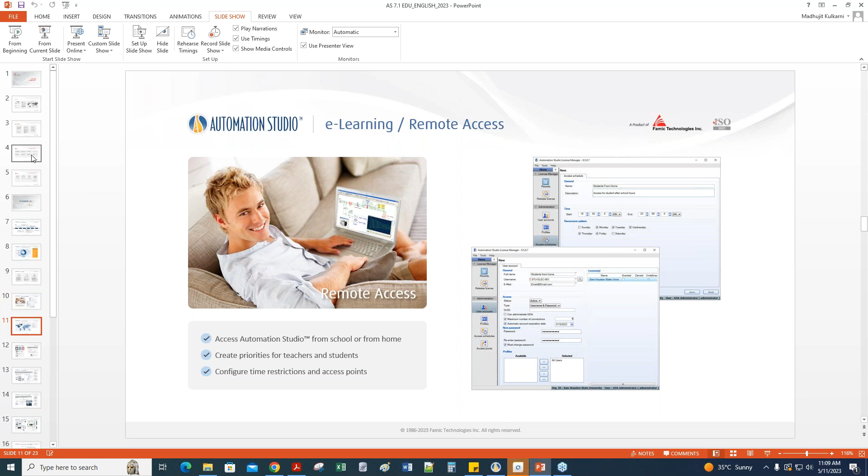Automation Studio is present in about 11 different languages and in about 120 countries. It is being used in high schools, career centers or training centers, colleges, different universities, and also for workforce development, where corporate people use the software to train their engineers.

These are the interactive exercises I was talking about. In the Teachware, students can access different exercises, and there are quizzes they can answer, and they can also generate their reports. This helps them understand the basic concepts used in the software, and they are able to relate it with the actual environment.

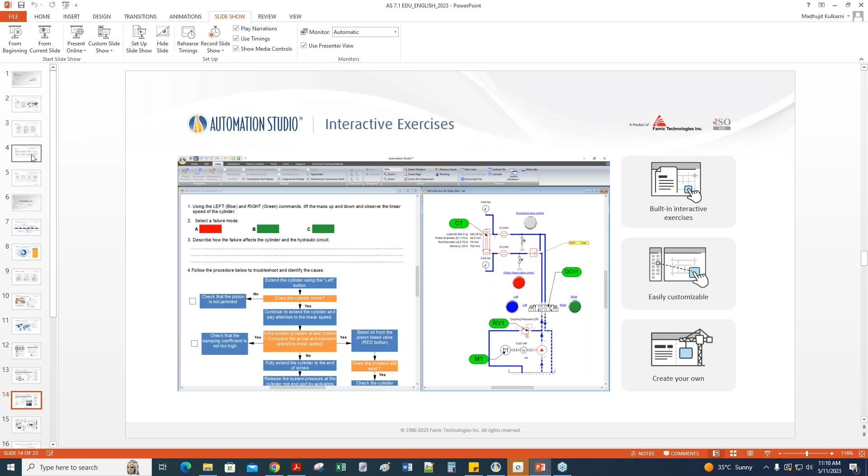Now in the latest versions of Automation Studio, you will be able to see the digital twin of your equipment. That is, the actual hardware kit can be represented exactly on the Automation Studio diagram, and you can physically verify the results from your laboratory getting implemented in AS, or vice versa. So that basically is the digital twin.

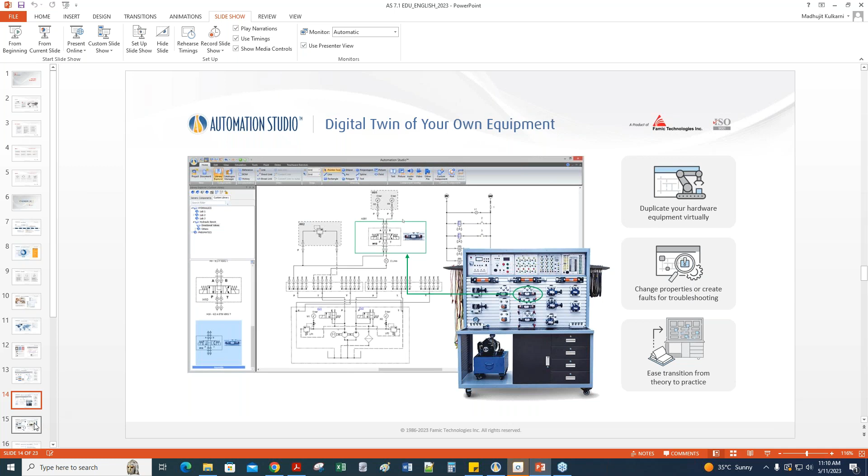There are a lot of illustrated libraries. I will show you, once I start the session, wherein you can view different components or different projects where the actuators or the equipment give you a real-time view of what exactly you see and how that can be represented in AS. That is what is meant by the illustrated libraries.

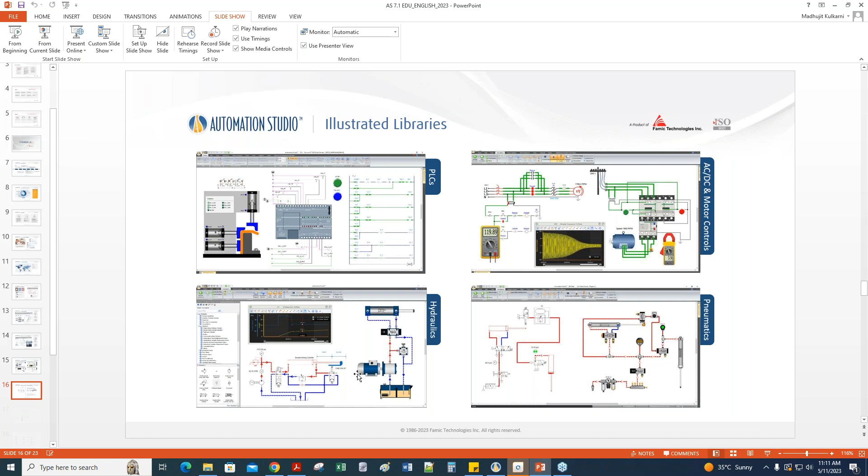So the benefits plus the hands-on experience is what you get, with hardware only, that is the hydraulics and electro-hydraulics trainers, and also hardware plus Automation Studio. This could be the less expensive option that you might opt for.

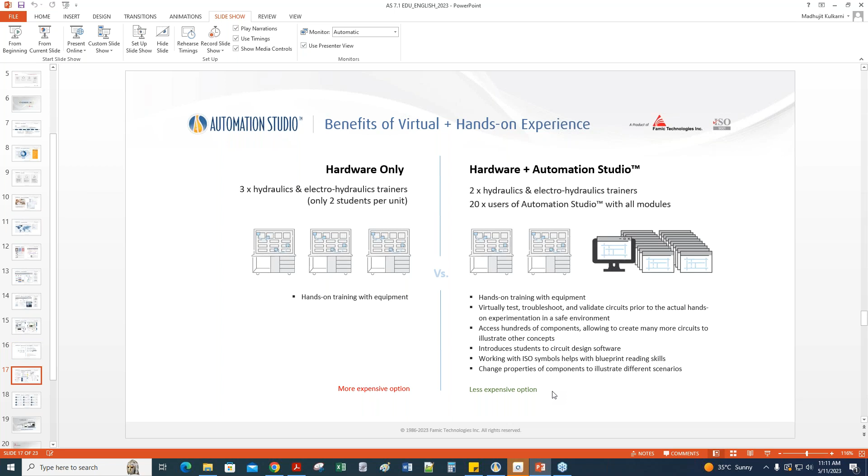We also offer complementary consultancy services, that is support. We also have the AS Live manifold. These are the three clients for which we have developed different manifolds, and we also develop configurators for manufacturers. For example, for Eaton, you can select the part number or code and drag and drop this particular product from the catalog. Similarly, for HydraForce and Rexroth, we have developed the manifold.

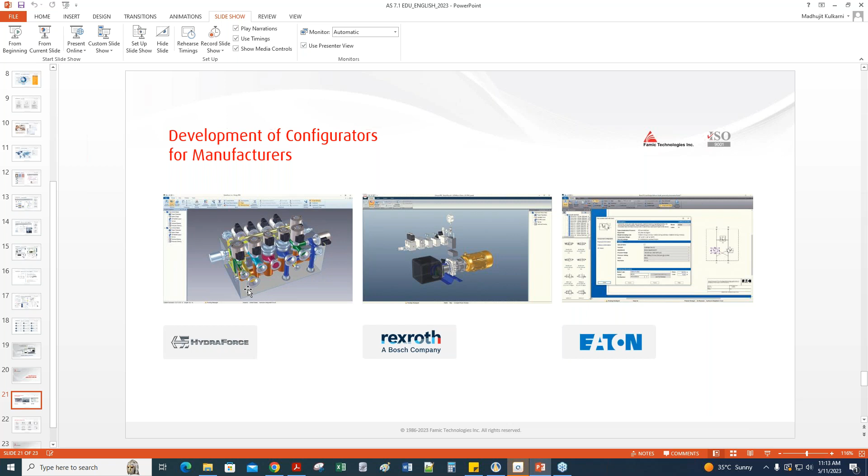So, training, maintenance, and services - this is the support we can give, right from training at customer premises up to turnkey solutions. That was it for the presentation, so now we will proceed with the actual session of pneumatics.

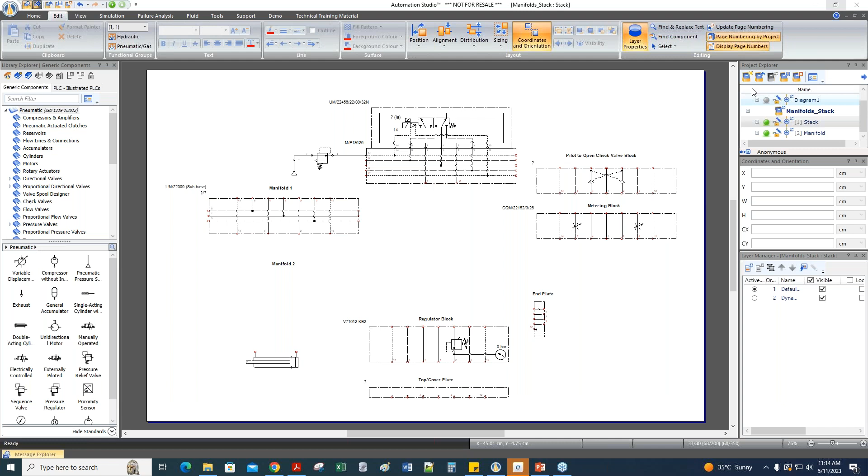Now coming to the software. Upon opening the software, this is the Automation Studio Professional Edition. If you come to the Library Explorer upon opening the software, on the left hand side you basically have the different modules we work upon, right from pneumatic, different electrical controls, ladder, electrotechnical, block diagrams, and HMI control panels.

There is also hydraulic in this. You can just select whichever library you want over here. On the right hand side, you have the project explorer, so you can just open this particular project, save it or close it from here. You have the access over here.

On the top, you have the different options, the ribbon, which will have the home tab, edit tab, view, simulation, failure, demo, and the technical training. So you can select different options to work upon.

So now coming to the pneumatic section, if I just select this library, here we have the default products or the most frequently used products. You can see different types of compressors, sources, pressure gauges.

These are the frequently used products available over here. So if you want to go for any specific product, you just have to go into this pneumatic module. If you just click it, you will get a drop down, from compressors up to the different measuring instruments. So you have a detailed list and you can select the components as per your requirement.

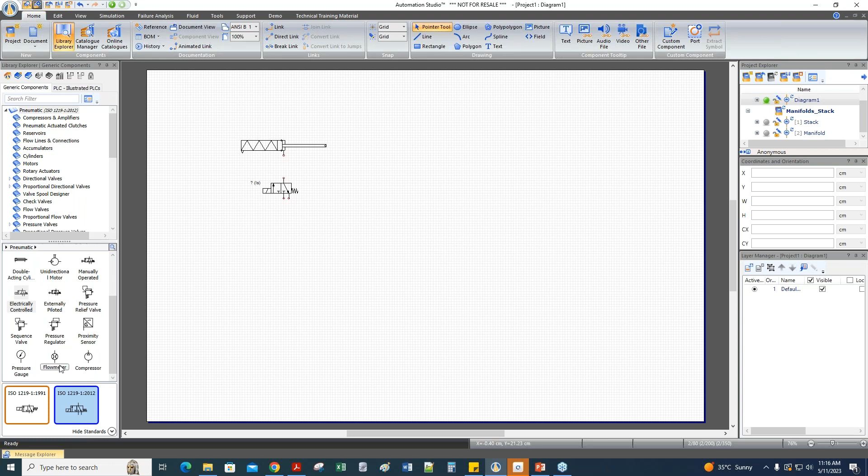So now we will just build a small circuit to see what all things we can do, how we can analyze the circuit in the pneumatic module. I will take, for example, the cylinder, maybe an electrically controlled directional valve, and a pneumatic source. From the fluid conditioning, I can directly take an FRL. I think these are the basic components just to build a small circuit.

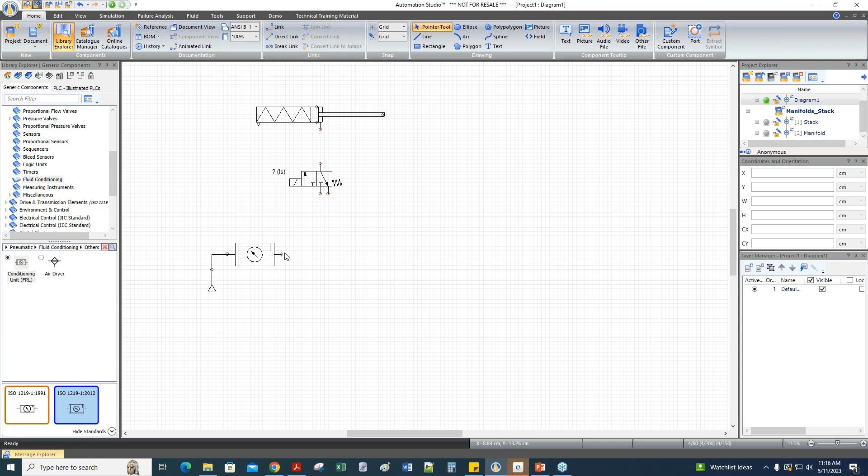So we will just establish the connection now. These lines are pneumatic lines, though they appear to be just CAD lines. If you just select this, it basically represents a pneumatic hose or a pneumatic connection. You have different properties, so you can change it over here, or customize it as per your requirement. So this is basically a pneumatic line.

Now to complete this, we will just connect an exhaust. So as of now, I've just built this small circuit. Now let us see basically what it does when I start the simulation.

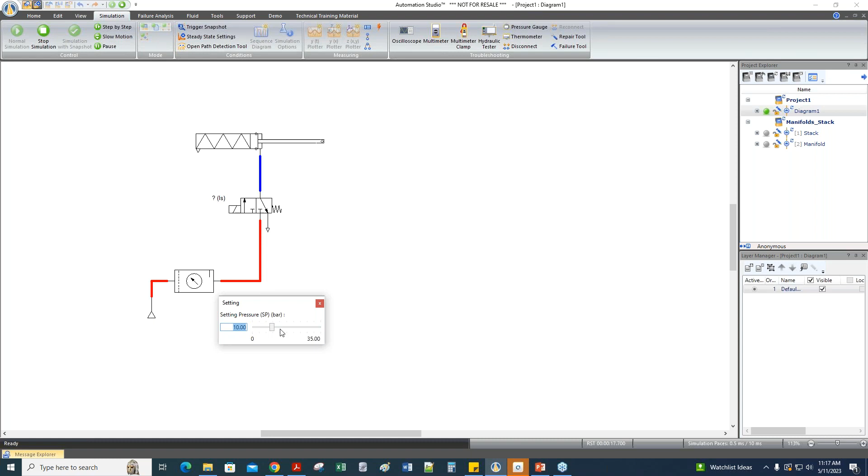Before actuating this, if you just select or click on this FRL unit, the only property that can be varied is the setting pressure, that is the output side, given by the regulator. So you can set it as per your requirement up to 35 bar.

Now if I just select this spool, you can see that the cylinder got actuated. Upon releasing it back, the actuator comes back and it remains retracted. So this is one way of just testing whether your circuit is right or wrong.

So now we can configure our circuit as per our requirement and the way we want. For example, this pressure source, if you just select this source, there is one illustration over here. The main properties are the diameter, and obviously you can vary the pressure.

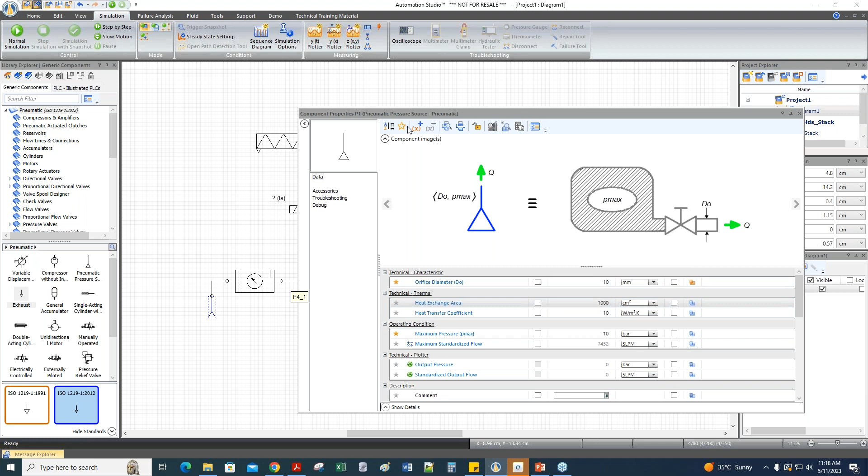You can vary this pressure or the maximum pressure you want in the circuit, and you can also vary this. For example, if I just change it to 10, you will see that my standardized flow will increase because indirectly my area has increased, so it is capable to give me a higher flow. In this way you can configure your pressure source, the pneumatic pressure source or the reservoir.

Similarly for the FRL unit, even here you can change the setting pressure. If at all you feel that the thermal simulation is on, you can even change the heat transfer coefficient and the area.

Now coming to this directional valve, this is a bit more advanced. Here basically you have this spool stroke. You have the pressure, you can change, you can set the temperatures, that is the range.

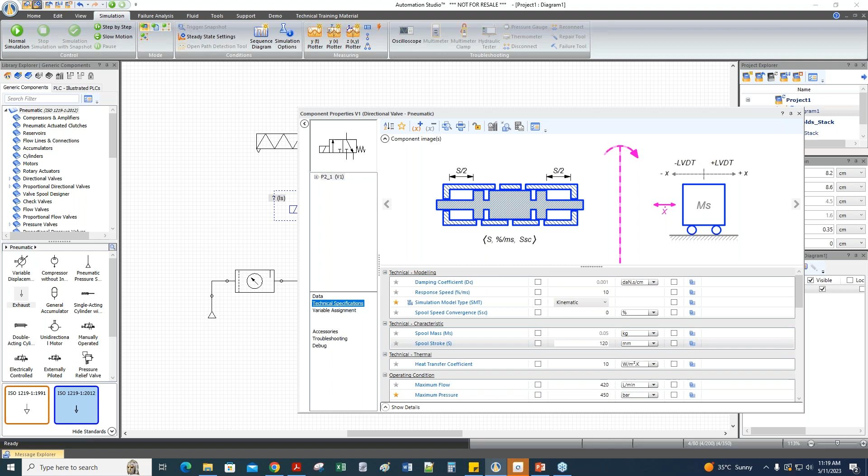Apart from this, if you just come to the technical specs over here, this offers you the type of command, the type of return you want. What I mean by that is, if you just select this solenoid and double click on it, there is a list of ISO 1219-1:2012 standard symbols, or the different types of commands available to actuate it. As of now we were discussing, the default I used was the solenoid.

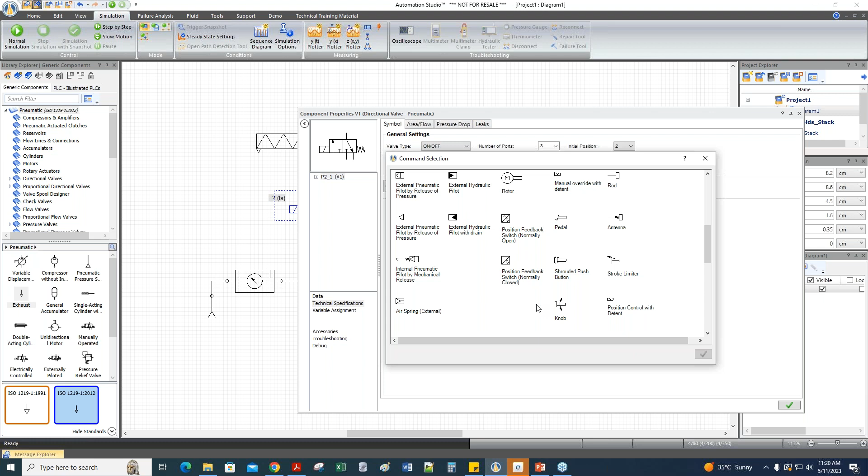So you can even actuate it as external pneumatic pilot. Now there is a two-way solenoid. You can use a push button, you can use a plunger, some kind of switching knob, up to the lever with detent.

Similarly for this, to make it return. Now you can also change the type of spool you want. If you just double click on the left spool, there is a list of ISO spools or certain standard spools that we use, from all closed connections up to the open center type, or 1 to 3. So you can select the different spools as per your requirement.

Now coming to the next tab, that is the area flow. Here you can set the nature of flow or the scale of flow you want through your directional valve. The default flow now is 2000. You can use different models, like from no flow model, or if it's defined by an area.

If I just select this, for example, now you can see that this has changed to the area. You just have to give the area, like what is your maximum opening when you come to this particular spool. Then we have the pressure line model, or the model defined by flow curve, then pressure line model defined by the flow curves.

Basically these are different methods in which you can set the openings so that on actuation you will get the particular result. So this is the pressure drop curve.

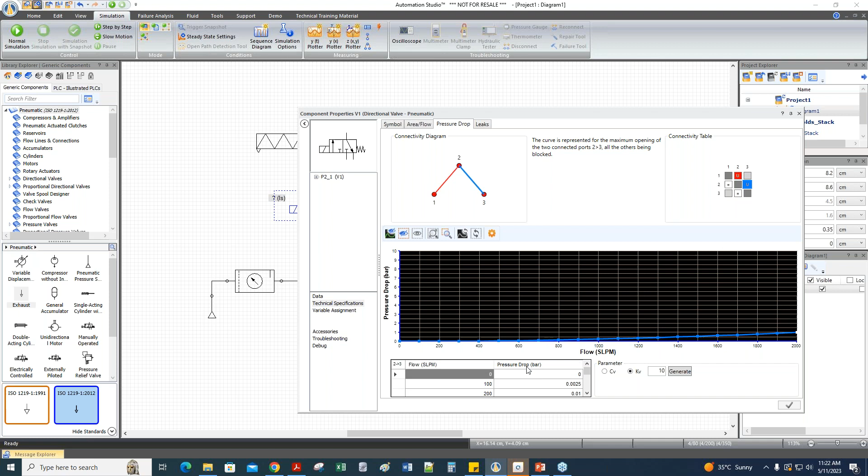In case it is an orifice model, these are by default. In case this is a user defined curve, for example, if I just make these as user defined, that is you can enter any point. If I just select apply, then the pressure drop curve can also go as user defined. Now you can see that I can enter the pressure drop value that I want.

So this is how you can configure different products in Automation Studio. Now coming to the cylinder, I will just show you one important feature. For cylinder, if you refer again to the data properties, it is a big list, so you can configure different properties.

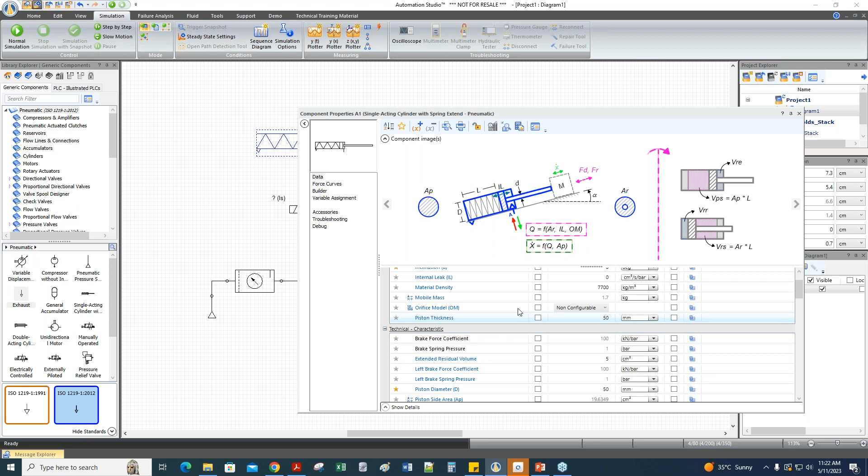You can also give the force curves in case you want to test it with say resistive force or driving force curve. So you can enter the resistive force value, or you can enter the driving force curve value over here, then you will get the result.

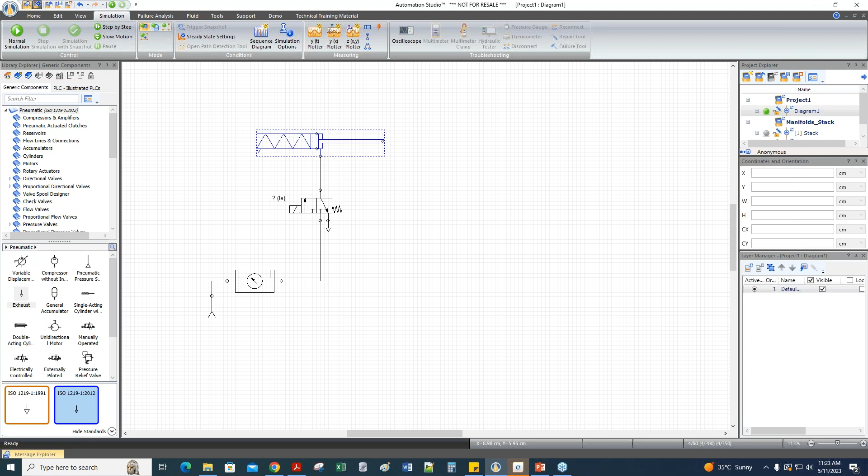Apart from that, we have the builder. So now the default apparent length is 4. Now for example, if I have two circuits and I just want to show you that one of my cylinder serves a bigger stroke or is larger than this, so if you just enter the data, you won't be able to physically verify it. So just to ensure that it is slightly big, you can select the builder.

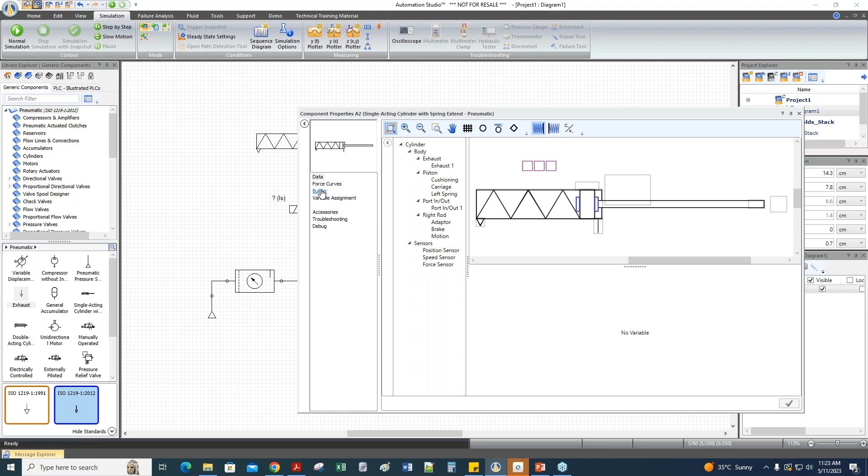Now if you just try to increase the apparent length to 6, you can see that this cylinder's dimension has increased, and you can see that my new apparent length is bigger than this in terms of the CAD.

So now this was about configuring the different products. Now we will see how to analyze different properties when you're in simulation.

If I start the simulation, for example, if I want to find out the pressure or flow values, or the type of stroke or how exactly this works, for this there is a component dynamic measuring instruments available in the measuring module of the simulation ribbon.

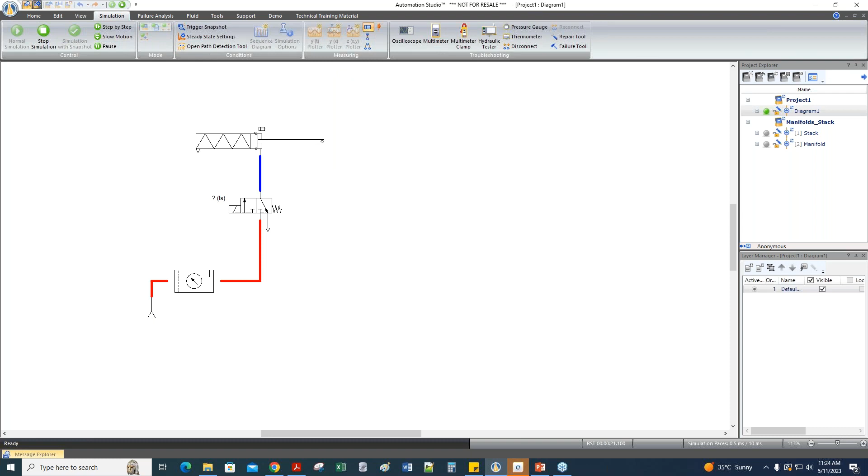So here if I just select this, and if I want to measure properties of the cylinder, for example, if you just select this and drag and drop it, it will offer you the different properties that you can measure. For example, I want to measure the linear position of the cylinder.

The displayed unit has different units, so you can select it as per your requirement. I will just keep it as mm. There is a precision up to which you can go, so for example, I will select 0.01.

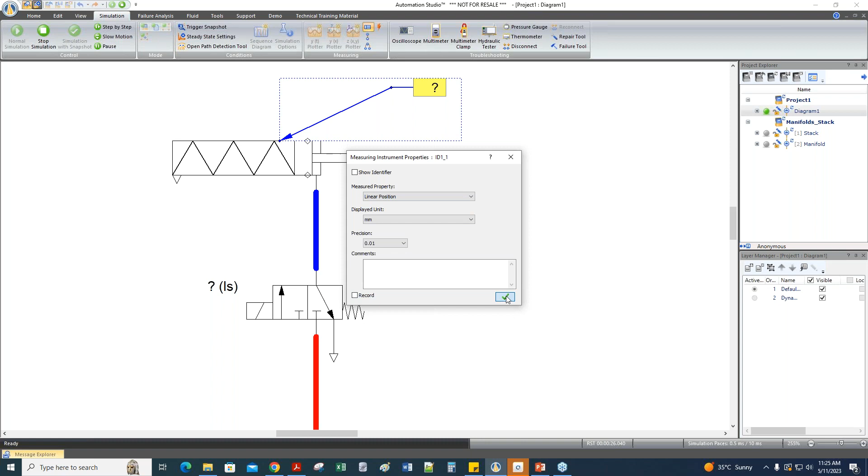You can also record these values in simulation, and then later you can extract it. So now I am going to record this. Now to see the results, basically where they are being generated, we will just select one y of t plotter.

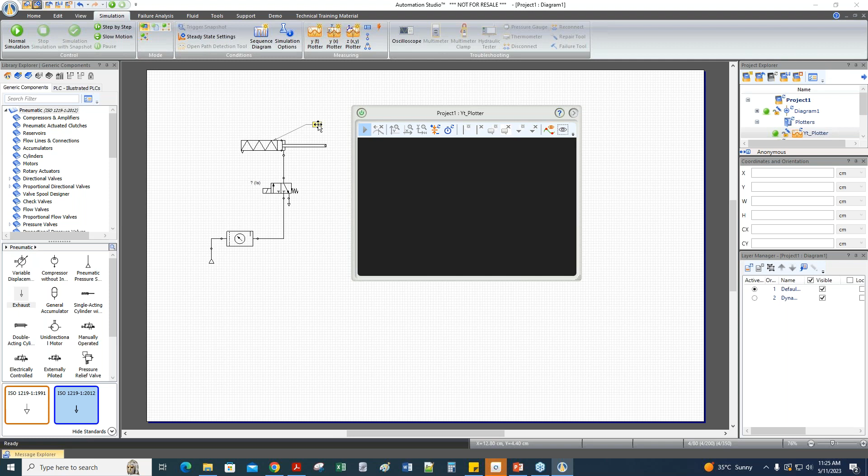Now you will see that a small screen appears like this. I will just drag and drop this particular property over here. So now you can see the length - if you remember, I had selected the position. So now it's length versus time, since this is y of t. Now the scale is ready.

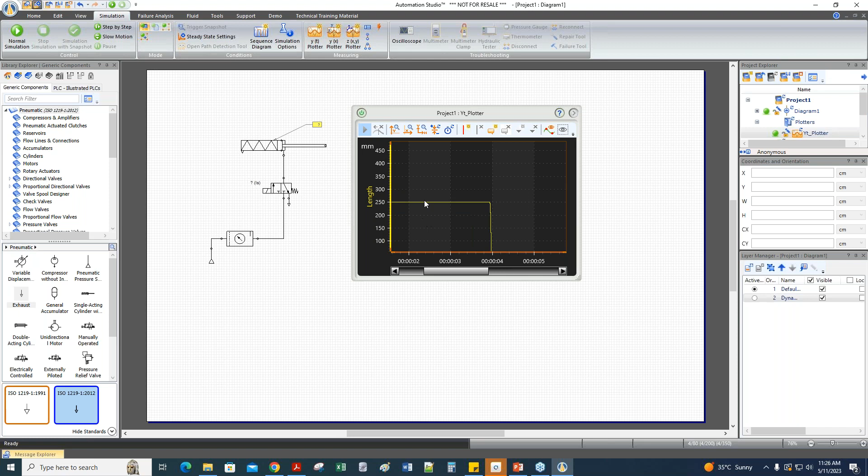Now when I start the simulation and actuate the cylinder, you can see that if I just pause it, or stop the simulation, initially my stroke was 250 because it was fully extended. Now when I gave the actuation, it retracted, so my stroke fell to 0. Now, from this we cannot exactly find out the timing of the retraction.

Now if I want to do a small calculation and analysis, I will just connect a small needle, or restrictor basically - we will take the fixed throttle. So now let's set this to say 0.5.

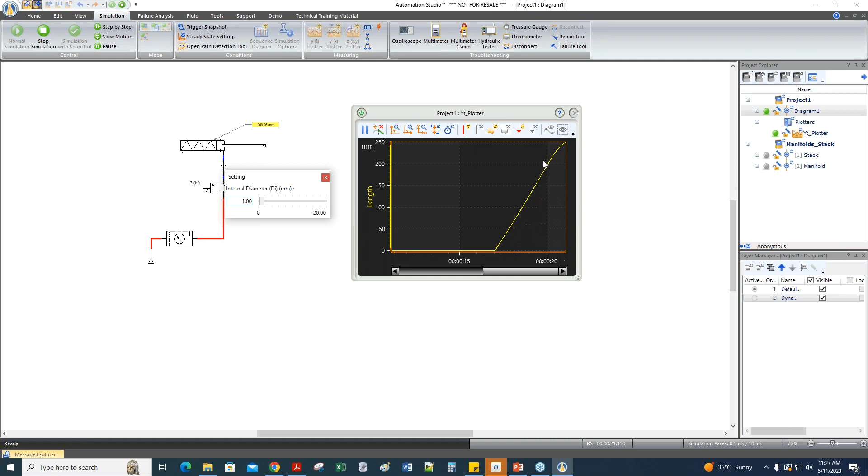If I were to just release it, now you can see my cylinder will start extending back. So if I freeze it now and take this cursor and adjust it, it is 0 over here. I'll select another cursor, say over here around 250. So you can see that the delta t is approximately 4 seconds.

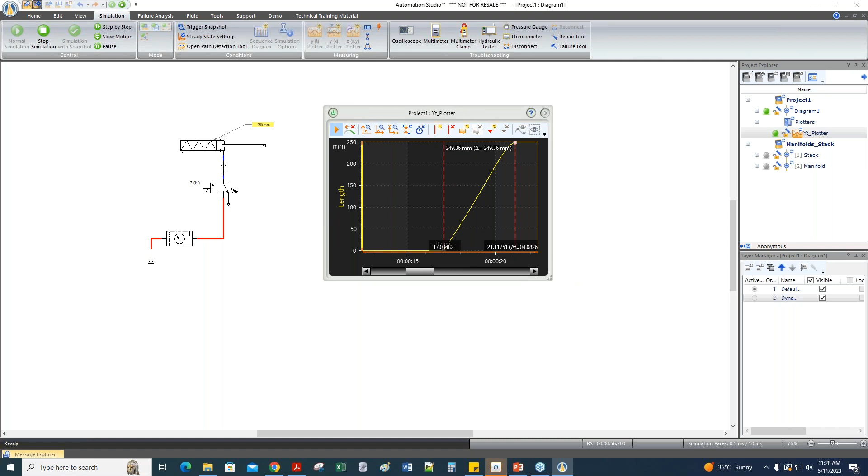So now I can try to find out the velocity - like this was the distance upon time, so this is the average velocity. The slope will be the average velocity with which my cylinder got retracted. So in this way you can analyze different circuits using plotters. This will help students and even technical people find out how precise the results given by AS are compared to the calculations we can physically do.

Now before proceeding to the next part, I will just make a small electrical connection to actuate. As of now, I just actuated it forcefully - we tried to extend it manually and I retracted it. The reason I'm showing this is in the next diagram you will be able to understand why I'm trying to do this.

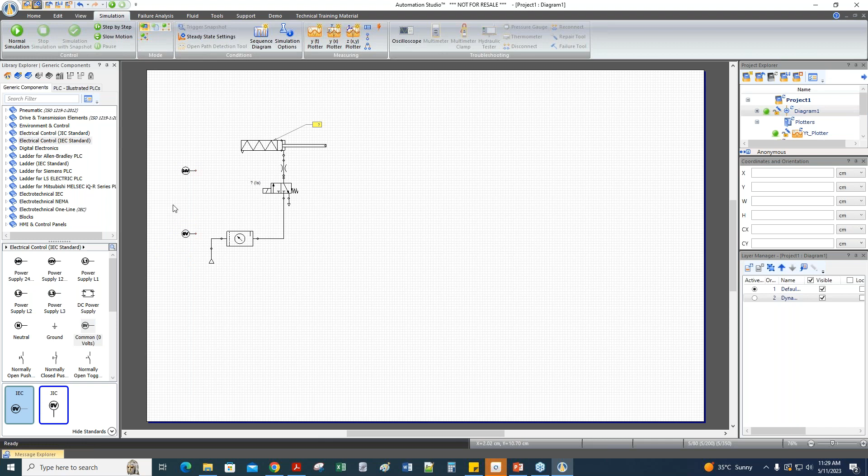I'll build a small electrical circuit to show you how to do the variable assignment and what the exact need for that is. So I will take the electrical 24 volts and 0 volt over here. I will take a normally open push button and call it PB1. I will take a solenoid coil - you can name it by any name of your choice. So we have just taken a coil, that is a solenoid, and a push button.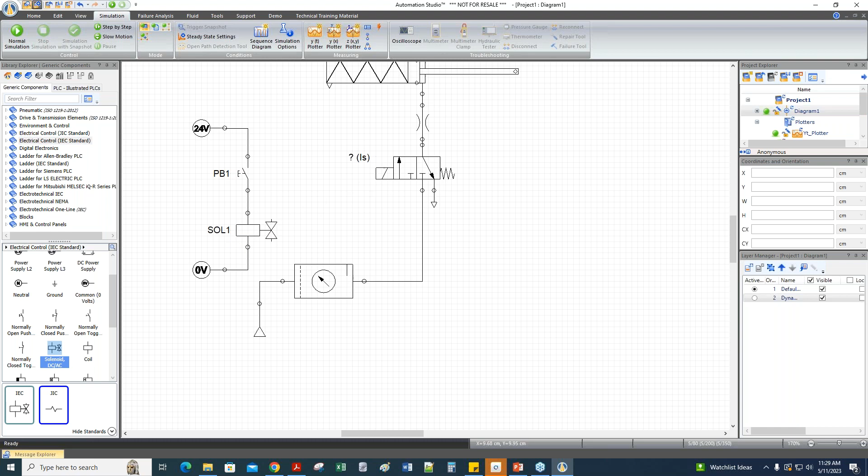Now this coil is nothing but the wiring of this one, only we are representing it in terms of the electrical connection. So to make this equivalent, we have to do the variable assignment. If you select this solenoid, come to the variable assignment - what is the variable name to be linked? That is SOL1, whatever name you have given. If you type it over here, the compatible simulation variable will appear. Select it and do the variable assignment. It says create a read and write association. So now I have done the variable assignment.

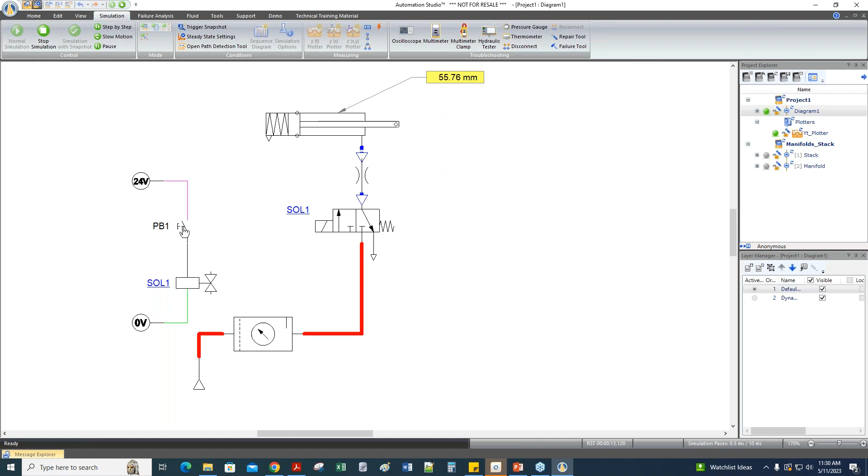If I just start the simulation now, and give the PB1 or push button, you can see that this solenoid is getting triggered electrically by this push button. So this is the concept of variable assignment. In this way, students can even integrate different electrical technologies or do different sequencing and link it to their pneumatic circuits. So this was a small basic example.

Now coming to the part we are interested in - we will see what stack valves and manifolds are. But before that, I had to do different connections by myself. Even in your laboratory, you'll have to connect one hose from this port to this port, again an orifice over here, establish a small connection, then from here to the cylinder - you have the blue pneumatic lines you keep connecting. Now what to do in compact applications where there is a constraint of space? In that case, we go for stack valves or the concept of manifold - that eliminates the need for a lot of pneumatic hoses.

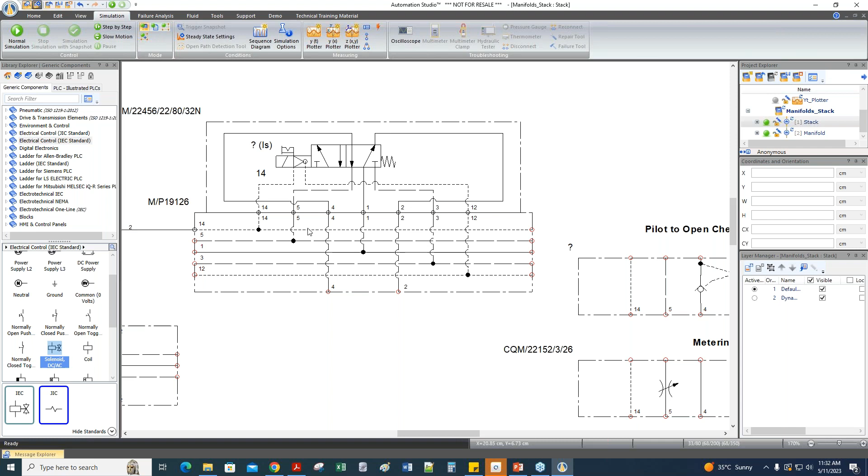So now if I come to this, let's see what we have over here. So initially, before going to this part, we'll just place this over here.

Okay, so now this basically is the directional valve. This is 5/2. Earlier we just saw a small example of 3/2.

Okay, so this has different input lines, and this basically is a kind of a manifold block. Though the connections are different, this is a bit slightly advanced to what we saw. So here basically you have the 5, 1, 3, 5, 1 and 3. So these two are mostly the exhaust ports. Port 1 is the input pneumatic port, right?

We can change the positions depending on the solenoid and a pilot over here. So this is basically an electro-pneumatic directional valve. It requires the electrical connection also.

So for this, we will do the variable assignment just as we saw. Okay, and this we will just see how this directional valve will now operate. So now how to do the connections. Now I will not, for example, connect it like this, like the earlier part.

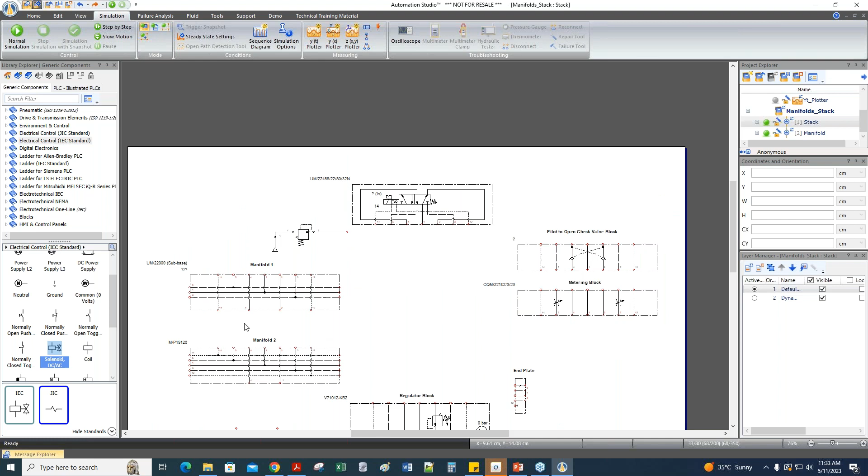So mostly we make use of the different manifolds that we have already built. Now, though these lines are pneumatic lines, the manifold block will not have a pneumatic line. It is a type of a casting that is done. Okay, and it has different manifold ports, and air flows from this particular input port via this chamber to port 1, because this is the same line.

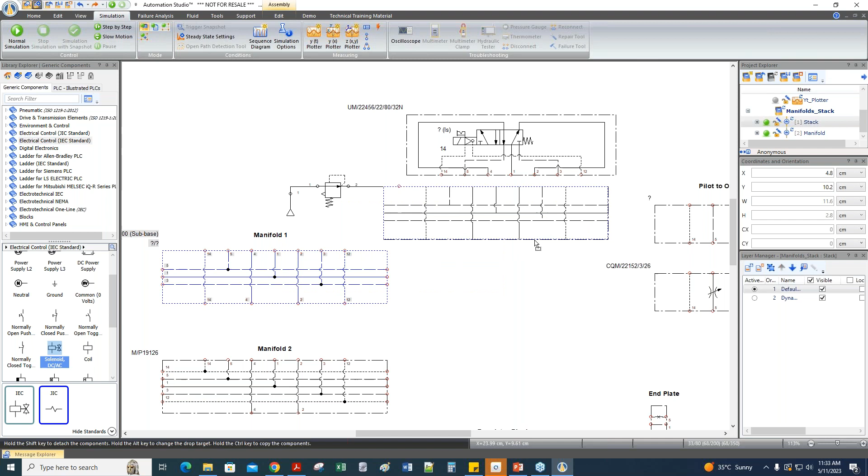So to connect this, for example, you just select this manifold. Okay, just align the ports and just drop it over there. Okay, so now what happened? This port 1 got connected to the port 1 of the manifold. Okay, and these two, 5 and 3, the exhaust ports, are now connected to the exhaust ports of the manifold.

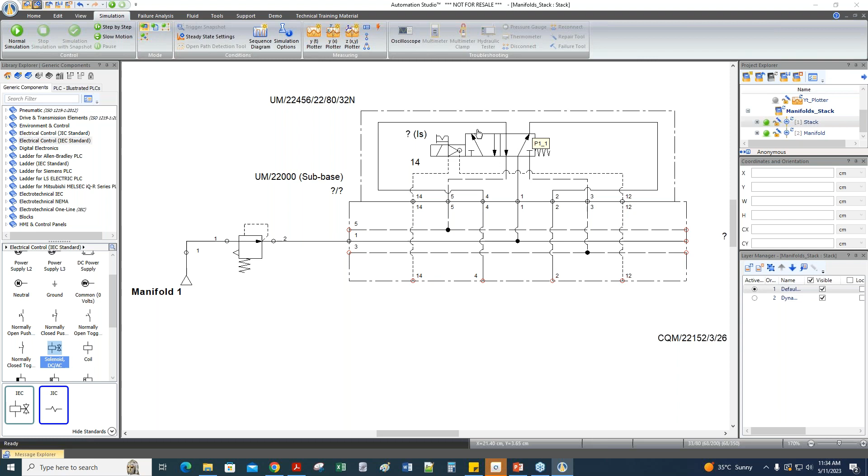So we have just placed our directional valve block on the sub base, that is the manifold over here. Now if I want to actuate this, obviously I will have to give a source. Okay, so you can see that I have a source over here. So I'll just place it together at this particular port, that is port 1. Now my pneumatic source via this regulator is now available at port 1 and can be used over here. Correct? So this is done.

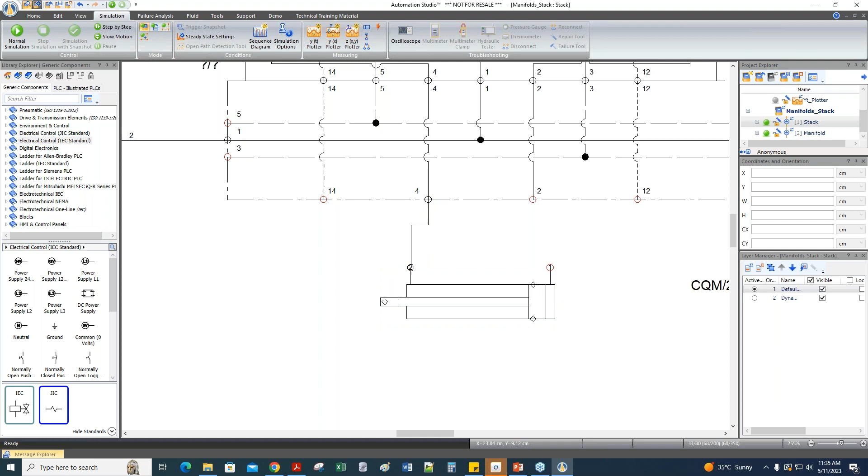Now before connecting this, we will just see what happens over here. Now if I just select this cylinder as an actuator, I will have to make the pneumatic connection. So I will just connect it like this. Okay, so we are taking the input air, and now depending on the actuations, I will be giving it to port number 2 or port 4 of the outlet.

Okay, so if I just start the simulation, now initially what happened, the moment I connected this, the air is now available from this port. It went to this cylinder, that is port 2, and my cylinder got actuated.

Now if I were to retract this cylinder now, okay, if I just, for example, select this particular spool, okay, so now you can see that air is available over here to this port. Now there is only one small thing which we missed, right? So that is basically the exhausts. If you see, there is no particular exhaust. That is why air is available from both ports.

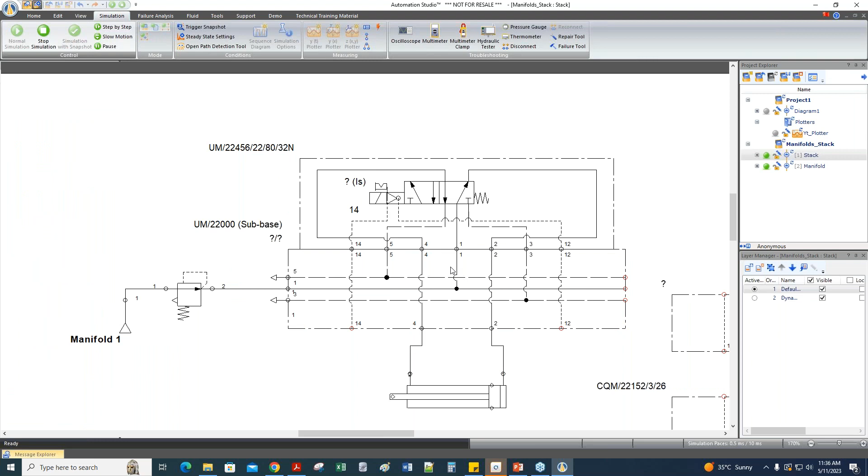So we will just quickly connect the exhausts, right? So just rotate this. I just place it over here now. Correct. Now if I release this, you can see that initially it was over here. If I connect this, you can see that my cylinder gets retracted.

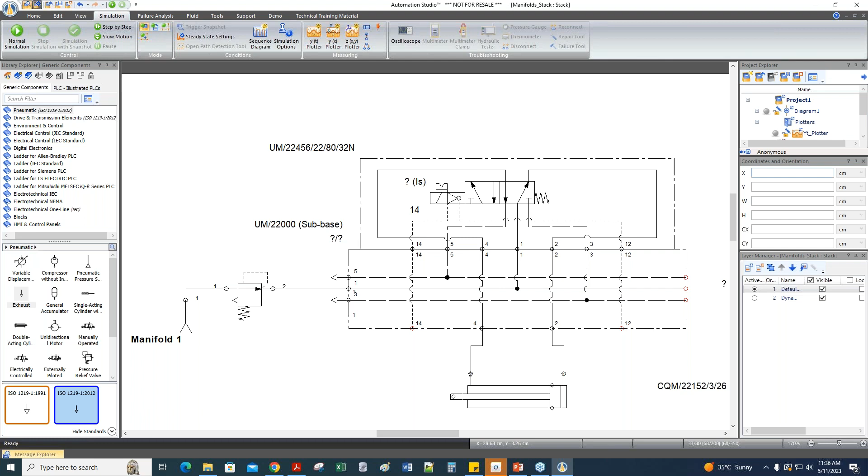Right. Now if I were to use this again in terms of the variable assignment, and like we discussed, okay, so only thing is that if I were to make, for example, a small electrical connection quickly now, we will just see how this will work differently in this case.

So if I just go to the electrical control, just take this coil now and just build it quickly and say name it SOL2, 24 volt, and say it normally open push button. Say call it PB2. Now there is one interesting thing in this.

Now initially we tried to do it forcefully, that is I just selected this pulse. In this case there will be a slight variation, so we will just see what that is. Now I connect it to 0 volts.

So now again the same step. This solenoid we will link it to SOL2. Okay, so now this is linked. Okay, so now if I start the simulation, and if I try to give PB2 now, you can see that this system will not work.

Why? The reason being, this solenoid is not just sufficient to actuate this like the earlier one, but here we have some pilot also. So it requires a pilot force together with the electrical solenoid to actuate this valve.

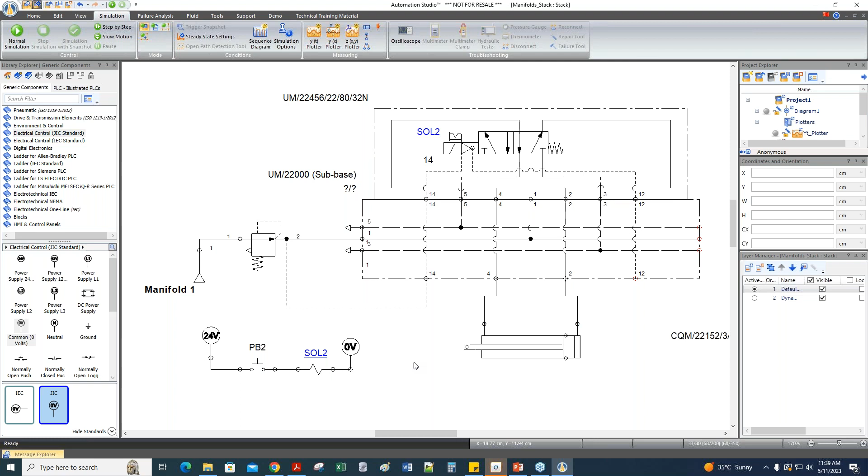Okay, so now we just saw this. So if there is a different requirement, I will just remove this particular thing. I just remove this actuator. So these are basically what we call stack valves. So initially, if you have a requirement of metering in or metering out, or if there is a pilot to open check valve, or even if there is a regulator, you can just go on stacking it as per your requirement, and finally, in the end, you build your actuator.

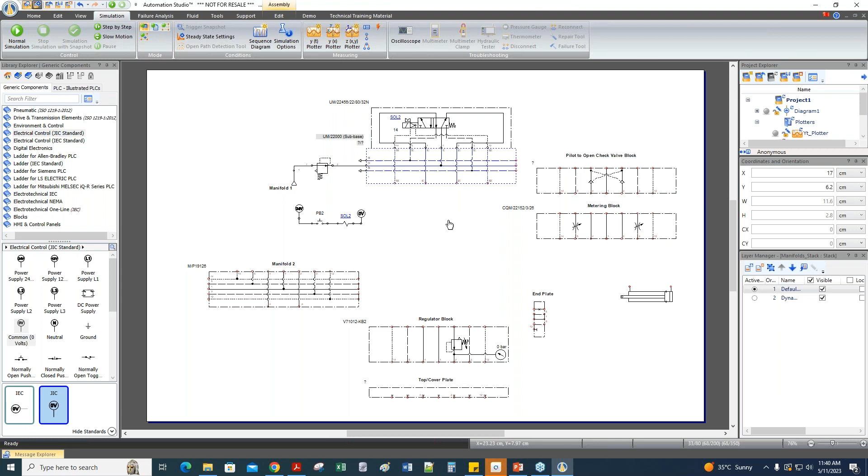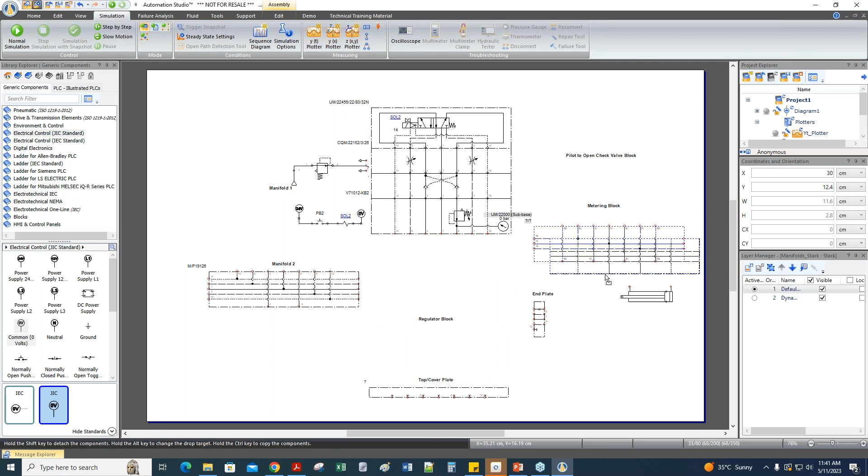For example, over here, this will be the bottommost plate. So before this, if there is any need of say a metering concept, you just stack it below. If you want a pilot to open check block, you can just connect it like this. And if you have to maintain a regulated pressure at output port 2, you can make use of this particular port. And finally, you can use either this manifold, or in case you want to connect 1,4 via a different external supply or source, you can even make use of this particular manifold.

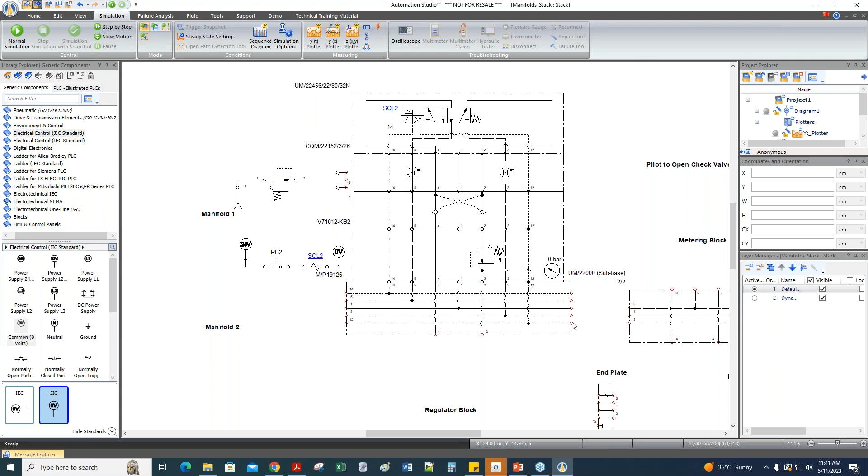Now, in case you want to end these connections over here, meaning there is no outlet available, you have the end plates, so you can just put your end plate over here. So in this case 1, 3 and 5 will run further. Your pilot ports will stop because there are plugs inserted. So in this way, you can build different types of end plates.

Suppose there is a case that you have different types of stack valves. I'll just move aside this part, and suppose there are two manifolds like this.

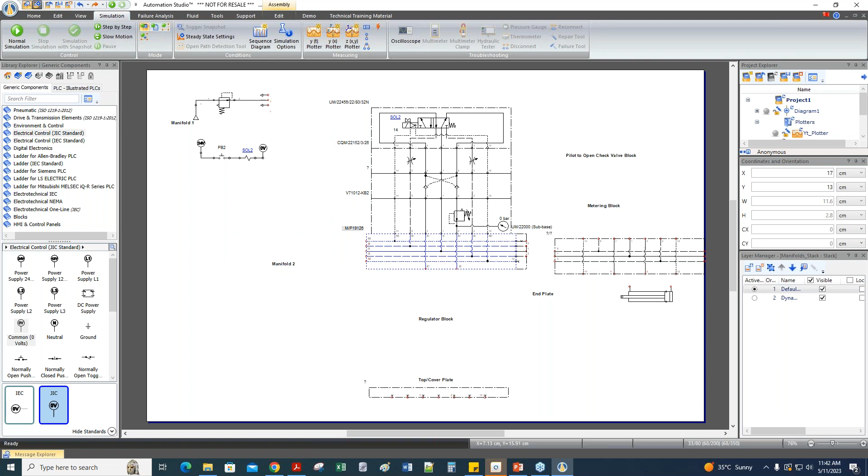And on one part you do not want any stack valves, you just want to keep it blank. So we have the cover plate or the top plate, and you can see that all ports are plugged. So you can just place it directly on this like this. It means that my input connections are only available to this; they are blocked over here. So in this way, you can build different stack valves.

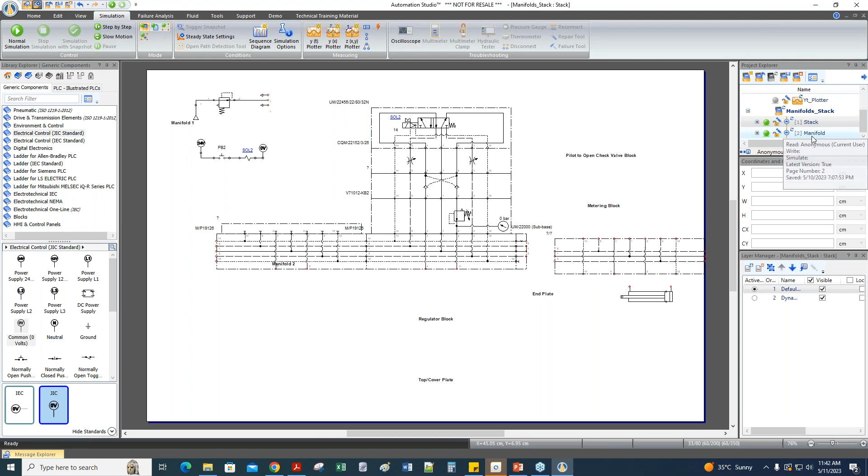So now we will quickly see how to go about the manifolds. So if you see, this is one type of manifold from Norgren.

So my teammates were currently working on this. They just built a small circuit representing this exactly over here. So this is the master on-off block, built over here. You can see these four solenoid coil blocks, that is the directional control valves which are solenoid operated. We have placed it over here, and below you see a manifold on which these are mounted. So this basically is that manifold. If you just refer the drawing over here, this has been built over here.

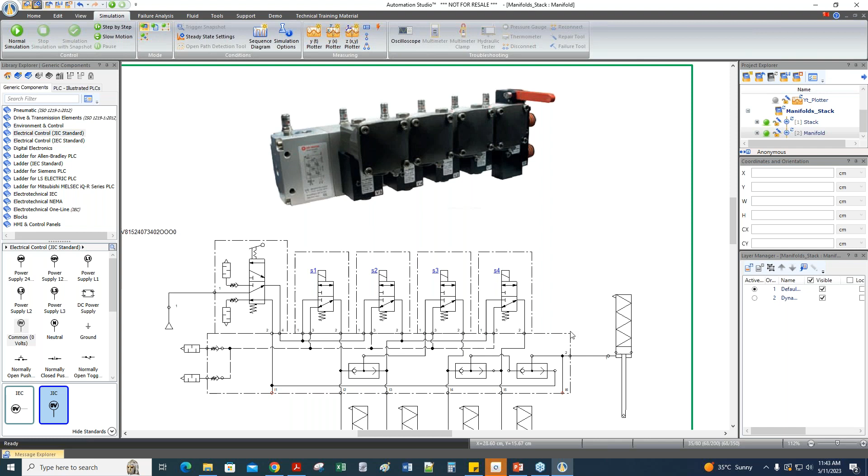Okay, so this basically together is a manifold block, unlike the earlier one which was in terms of stack. Here you just keep the directional valves directly on the manifold. So if you just start the simulation, and select the different solenoid coil, you can see that my cylinder 1 now works.

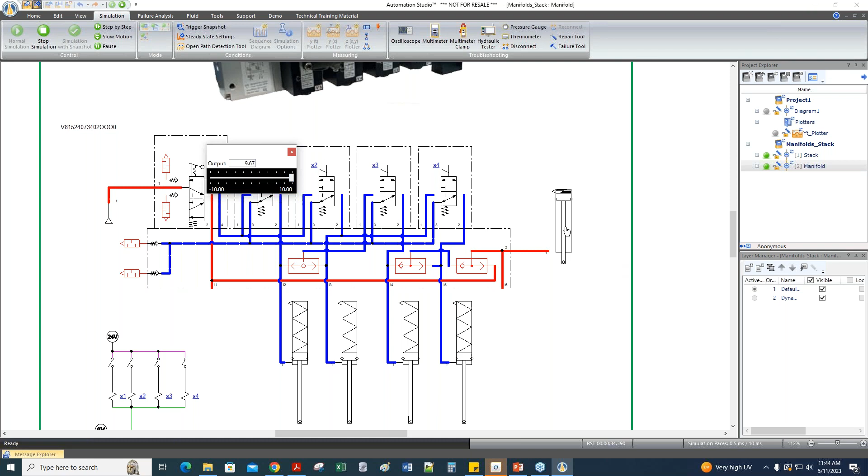Similarly, for cylinder 2, I'm just giving the electrical connections. Now if I just give 3, and if I give 4, and if I try to give this one, that is the main on-off valve, I can only actuate the final cylinder at the end. So in this way, you can build different manifold behavior logics.

You need only minimum connections. I have done connections only to the cylinders. The rest of the connections are within the manifold itself. So in AS, you can also build different modules like this, the ones available in your lab or actual industry products.

So this was about the manifolds, the stack valves. Now coming to the next part, as Janatics is our main client, and we are also in collaboration with Janatics, we have done the catalog for Janatics.

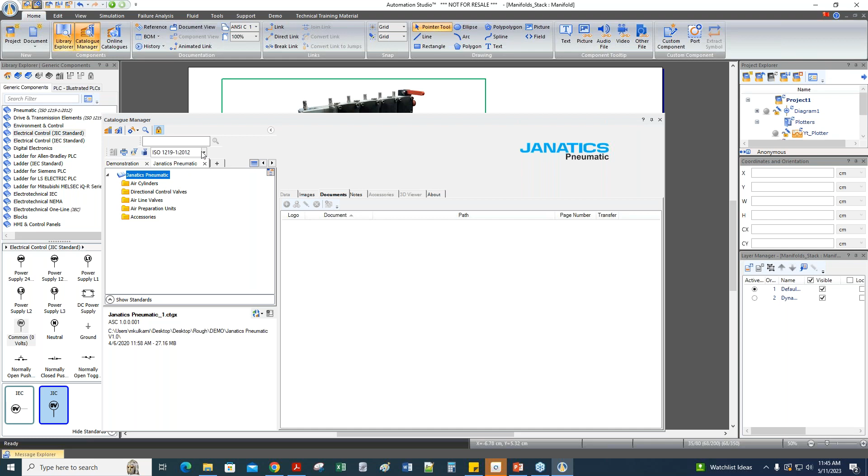So we have built the Janatics catalog. This is basically the catalog manager. Here we have the different products that Janatics has built, and we have done the catalog. So the different cylinders, the directional control valves, the airline valves, air preparation units, and the different accessories.

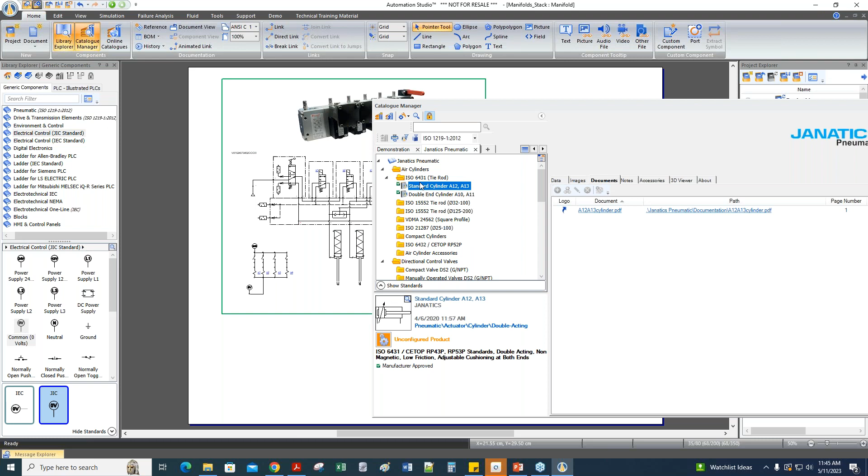Now, what I mean by this is, suppose I select this particular product, the ISO 6431 tie rod cylinder. So now this is basically the catalog manager. You can see that this image is the actual Janatics built product. So now we have modeled it in AS referring to the exact specifications given by Janatics.

So what are those? If I just go into the data, these are the data properties that the product has been designed with by Janatics. For example, the cushion length is 21, the piston diameter is 32, the stroke is 25. The temperature limits for this particular product are 5 to 60.

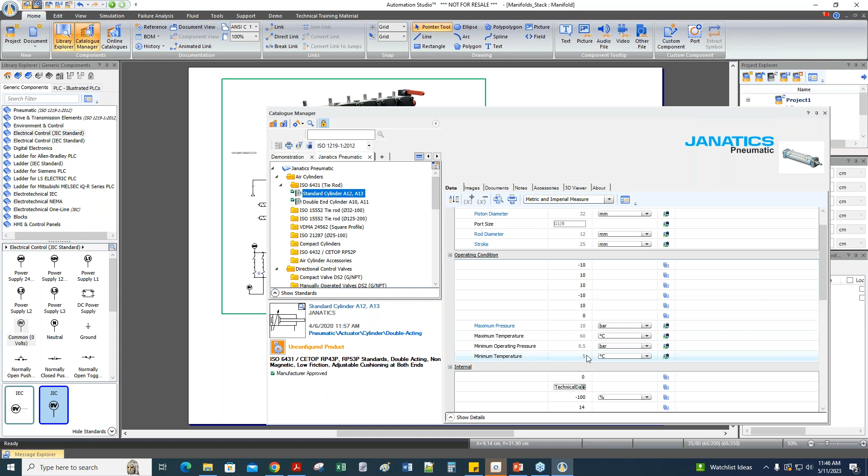So if I select the configurator over here, you can see the different properties that I can select, the model, whether I want a magnetic or non-magnetic. Suppose I select a magnetic cylinder.

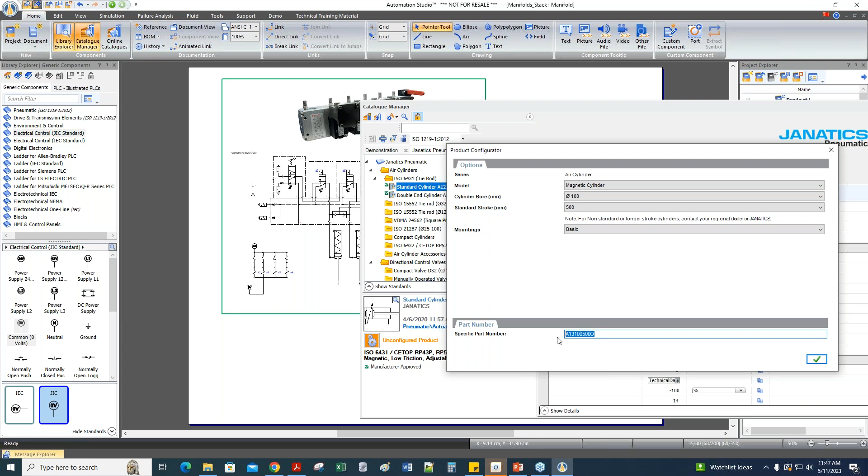The bore is from 32 to 100. Suppose I select 100, stroke I will select 500, and I will select now the basic. So you can see that one part number has been generated. If you visit the Janatics website, you will find that this particular product is available.

So that is what we have built over here. Now if I just configure this, you can see that my cylinder is now as per the selections I have done. So if I just drag and drop it, this particular cylinder, unlike those, now stands to the exact dimensions that have been considered or given by Janatics.

This is basically the difference. The initial cylinder that we saw there, the double acting one, unlike that, this conforms with the standards as per Janatics, whatever they have given. So that is the importance of the catalog. In catalogs, you can create products depending on specific requirements.

Now, if I visit this cylinder, the data properties cannot be modified because they have been locked. You cannot change this. You can configure it in the catalog and use it as a standard product for your project, which has been done according to Janatics or their standards. So this is what the Janatics catalog is about.

So unlike that, we have different products, this was just a simple example of a cylinder. You can go for different directional valves also, different types of valves, filters, regulators, FRL units, etc.

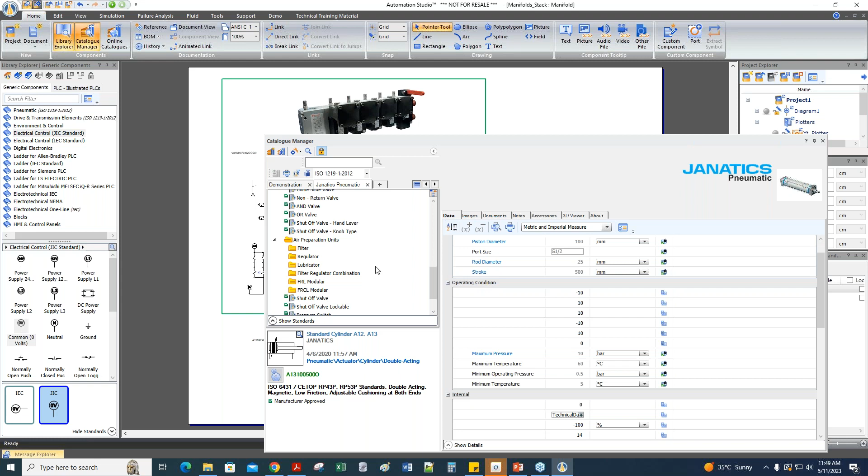So now if I go into this pneumatic module of the demo, I will show you a small example of a gripper, how we have developed a small gripper using pneumatics. This will help you understand how you can actually model and design your system. I'll just wait for this project to open.

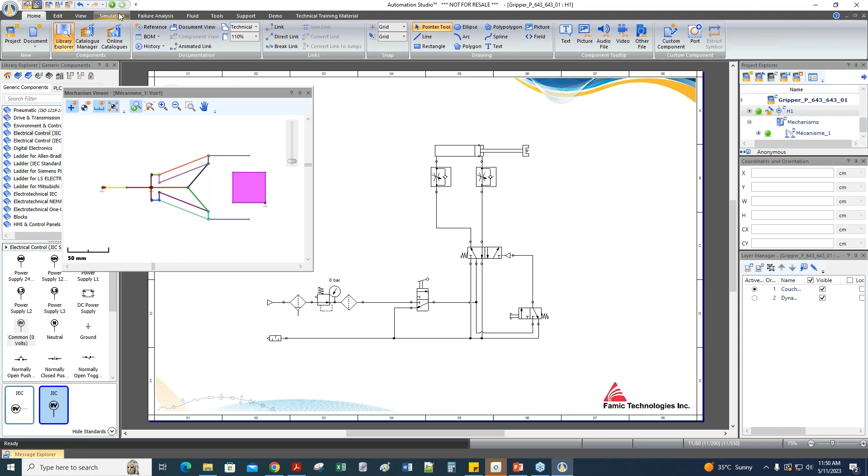Yes, so now you can see a small circuit that has been built. Here you also have the mechanism viewer. This is the mechanism for this particular gripper. So if you would just start the simulation now. So now if I just actuate this, I think it is already extended. If I just give this...

You can see that the gripping action has been done. Now the ungripping action is being done. So you can see the gripping action, and you can see the ungripping action, right?

So in this way, you can build the pneumatic circuit and you can also create the equivalent mechanism. You can create links using the mechanism viewer in Automation Studio. So this is one small example to understand how pneumatic circuits can be used to build different applications.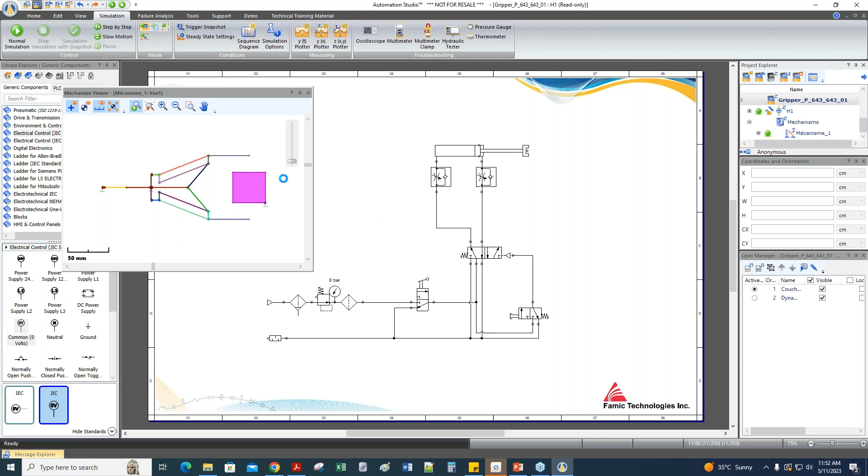So now there is also another example. We will just close this project. So there is another example of sequencing. I will just present it to you how you can do the sequencing. We will just see the sequencer example.

So basically this is the demo catalog that we also build, unlike the Janatics catalog. This is for demonstration purposes. So this is what we call it as a demo catalog.

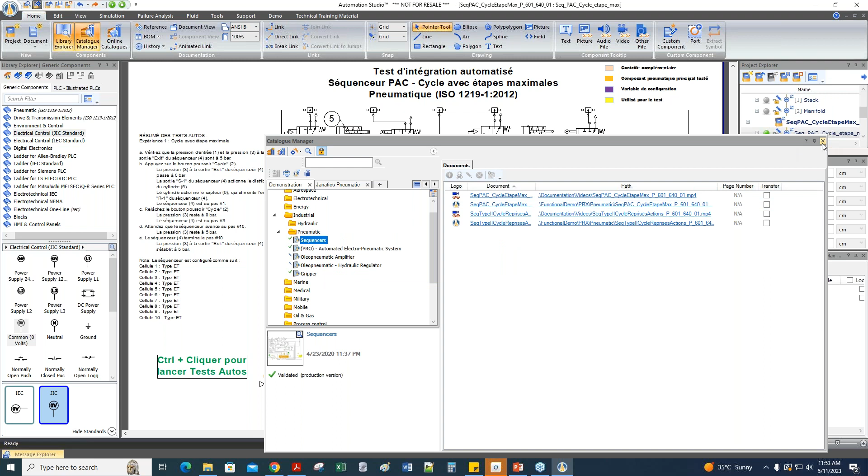So you can see the complexity of this particular project. There are instructions, so this has been built. I mean, this is basically written in French, but you can see the complexity. It makes use of different modules to actuate this.

Right, so let's see how this simulates. So you can see that different cylinders are now working in progression.

We started from this topmost cylinder 5 up to the cylinder number 9, right? Correct. So if I were to restart this again, you can see that it starts from the cylinder and it comes to the last one over here. So this is basically an example of sequencing right from cylinder 5 up to this.

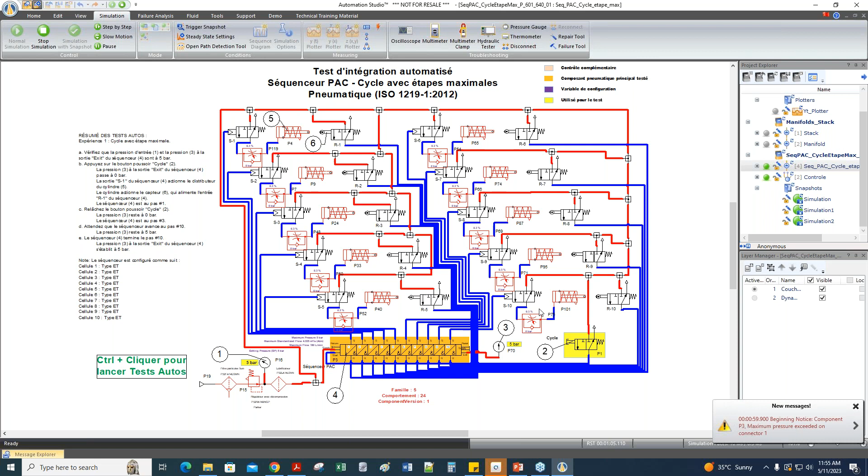So in this way you can even build complex circuits. The students can be able to build it using the roller switches and make use of that logic for the next one. In this way you can go on building the required sequencing. So this was the second example.

So now coming to the last part, that is the Andon Studio. Saurabh will just tell you what exactly is Andon Studio, why we are doing that, what is the complexity of the market. It is necessary to integrate and have smart solutions to manage the workstation, the order. We can calculate the time needed. The Andon Studio also gives you the required results to monitor in case you're lagging or leading somewhere. So all that is covered in a different software called Andon Studio. Saurabh will just tell you what that is in a very short and crisp way.

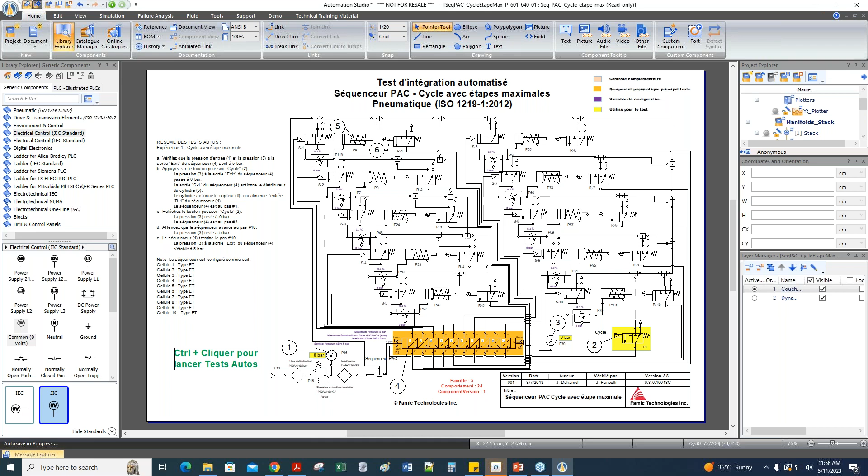Yeah, I hope my screen is visible. Yes, yes. Yes, so Andon Studio is more related to Industry 4.0. It monitors the real-time data. It is mostly used in industrial engineering, then operations management, business processes, and quality.

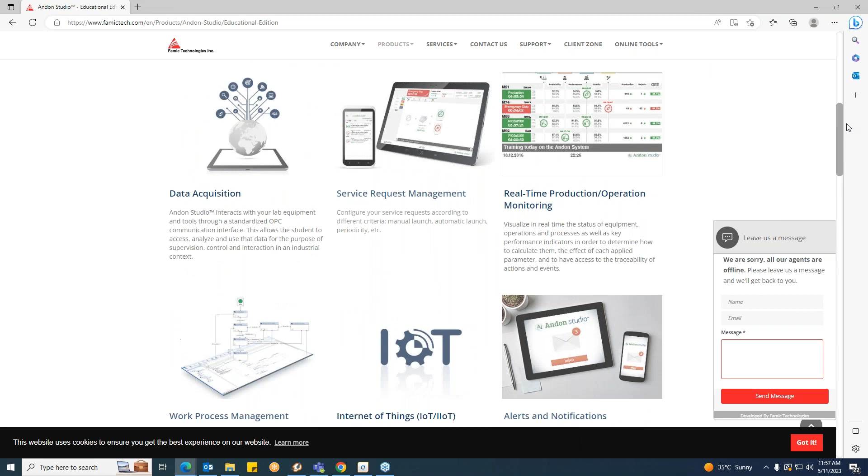So what are all the features covered in Andon Studio? You can see here, you can also see these features in our website. You can go to products, and in the Andon Studio you can find professional edition and education edition. For the educational purpose, if you want to see, you can just click on educational edition, and you can see all the features, like data acquisition, service request management, real-time production operation monitoring, then work process management, IoT, then alerts and notifications.

Inspection and quality, then custom reports generation, categorization and access to documentation, data logging. So all these features are available in Andon Studio.

So if you want to see the brochure, you can just go to product brochure, and you can select the language, and you will find here. So if you want, you can find more detail. And if you want to have a detailed demo on it, you can request us anytime, and we can arrange a small demo for you on Andon Studio.

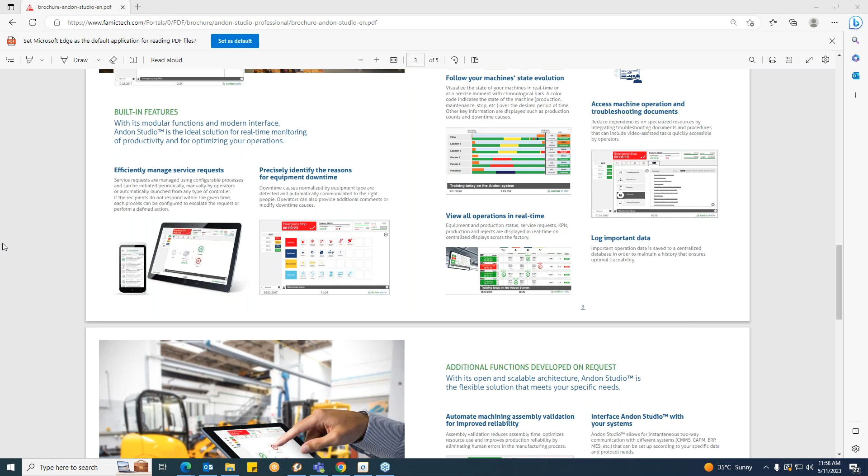Saurabh, can you just... I'm not able to. Yeah, I think there is one question, asking how we can build our own manifold. Also, in our practical application, the tube connection plays an important role on friction. Can we define the length of tubes in simulations? Yes, so that can be done. So Saurabh, can you just make me the presenter?

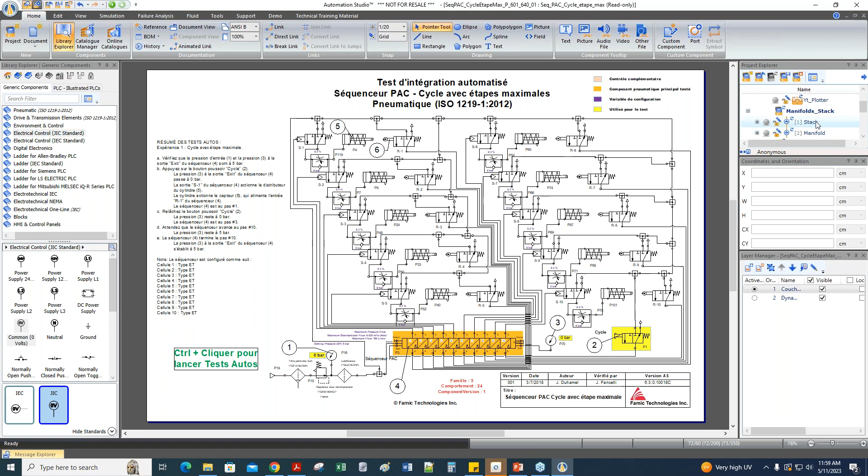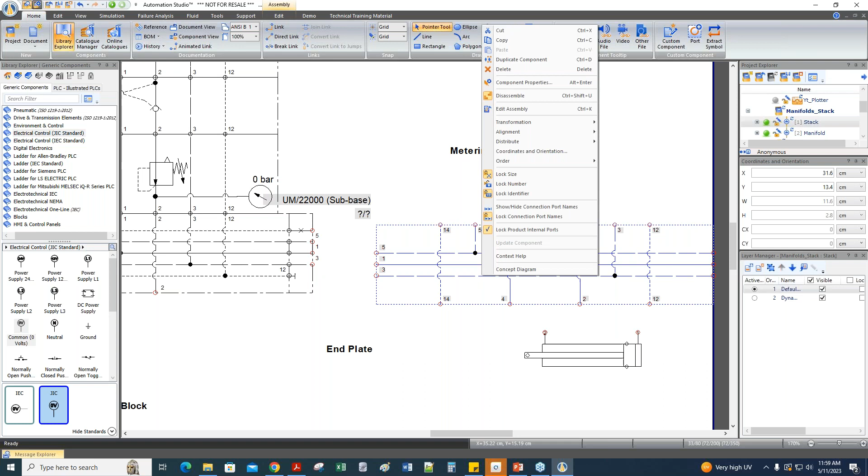Yeah, so if I just go to the manifold or the stack, for example. If I select this, this basically is the manifold that we have done. Now if I want to change the property of, say, the length within the manifold, I will just disassemble it because this is an assembly of lines.

So now these are the actual lines that we initially saw. If you select this and unlock the properties, you can select different types of lines with different diameters and different lengths. If you select this feature, you can change the internal diameter and length.

You can change the heat transfer coefficient. Only for pneumatic lines, friction is not that important because pneumatics are mostly used for automation, so we do not discuss friction loss. That is mostly relevant in hydraulics. But yes, you can change different properties, lines, lengths, and even the material is available. That can be configured in AS.

Mustafa is asking that there is a lot to learn in this Andon friendly user interface. Yes, I think we can organize a separate demo for this, since Andon cannot be covered in 5 to 10 minutes, it will need time. It helps you analyze different concepts related to automation or a production line, and it works similarly, using the industry 4.0 concept.

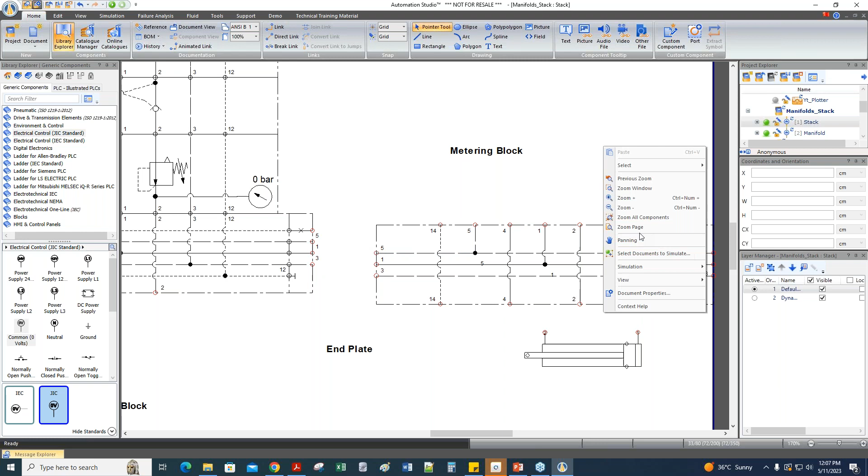How does it compare with Festo's FluidSIM software? In terms of, for example, if I were to start the simulation again, or revisit the very first small circuit I built and start the simulation now, all these dynamic measuring things in terms of the plotter - I think Festo will not be able to generate much of this.

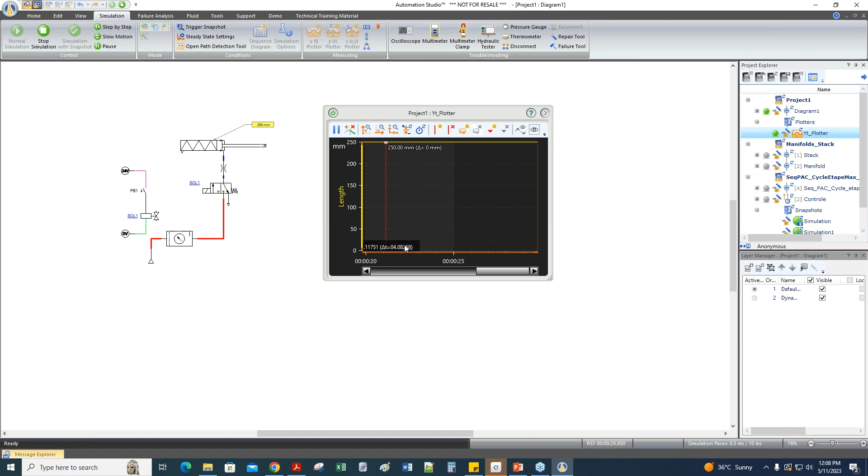Even for hydraulics, it could be explained to a much larger extent, because even the color of the fluid lines changes depending on the pressure. It can monitor up to fractions of a second and we get accurate results. I mostly showed you the different types of spools, the area flow curves. If you visit the pneumatics, the range of components and different technical properties, I'd say it gives you a wider range in terms of simulation compared to Festo.

Okay. My question is, do you provide support for internships and final projects?

Sir, I think we give an opportunity to MTech students for internships also. I'm not sure about projects, because projects are something to be built. But if I were to tell you about my experience, I built my MTech project on this software itself - I built a pick and place robot that sorts items as per different colors and places them in racks. I used Automation Studio as a PLC because I could not afford the actual PLC, as it costs a lot of money. So we're not giving projects, but we do give internship opportunities to students if they're willing to work with us.

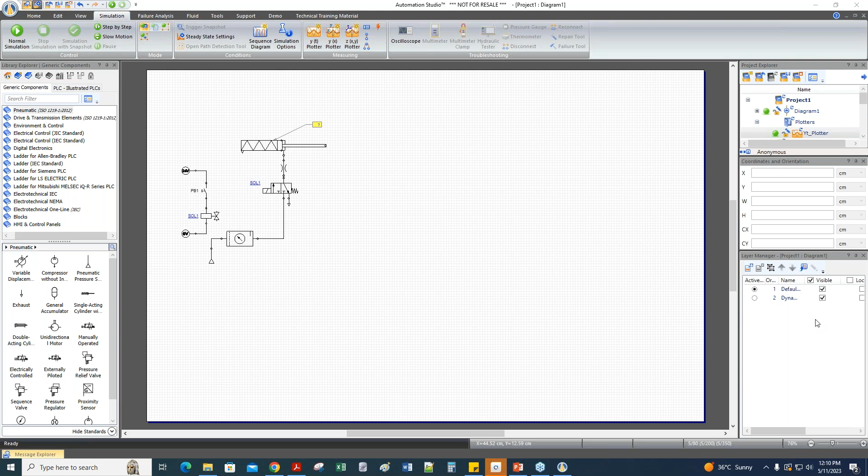Only thing is, how will we go about getting an internship? Maybe Saurabh or my colleagues can answer this, since we had two colleagues earlier for internship. So Saurabh, can you answer how we will get the internship? Basically, if we are providing internships, we will definitely contact you. Currently I'm not aware of this, so I will let you know.

So I guess we can end here. Sunil sir, do you want to say something?